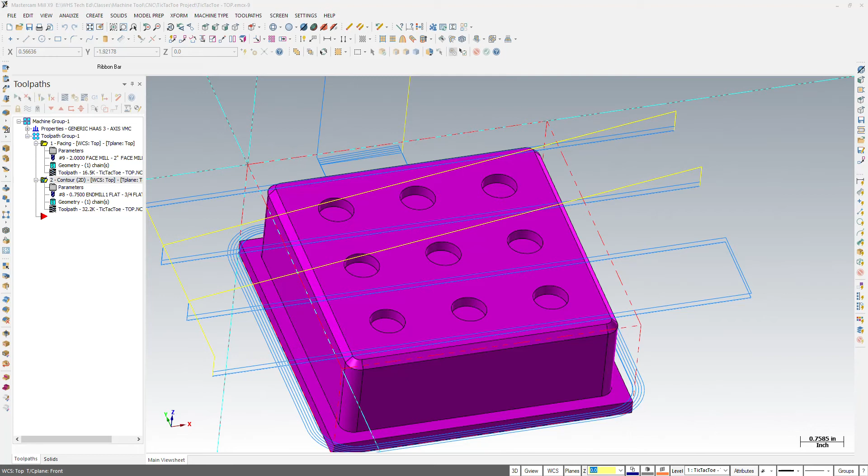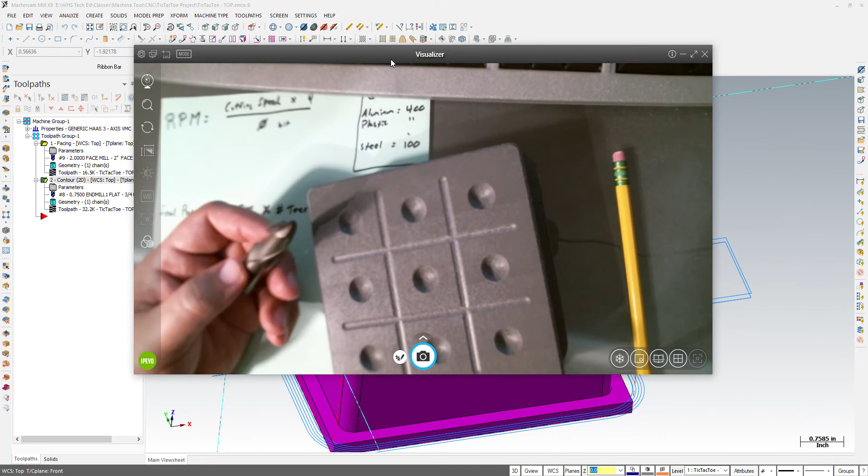Well, our next process on this Mastercam Tic-Tac-Toe project is going to be the dimples on the top. And for those dimples, we're going to be using a 5/8 inch diameter ball end mill, and we're going to be basically just drilling into those holes. So the CAD file does not really match the final product. That's okay, we just need the depth and the location of those circles in order to do a drilling operation

in Mastercam. So we're going to go top view again, toolpath, drill. It asks us what our center points are, so we're going to go ahead and grab each of the center points. You got to be careful that you're not grabbing any other points. We want to get the center point. So right there you'll see as I first hover over that, it gives me the center of it. So if I come over there, the center was highlighted.

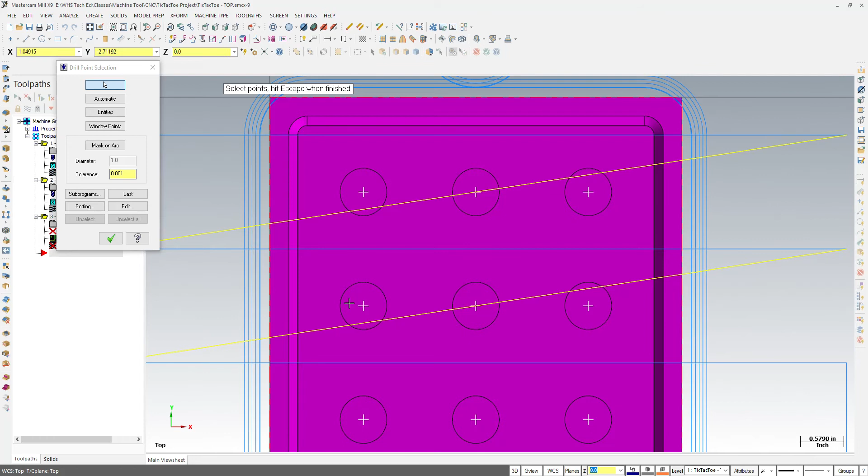So I'm going to come in here, click, and make sure that center is what's highlighted, not an edge or a corner, because sometimes it can grab the wrong point. If I do it right, plus signs are in the middle of each of the circles. And OK. Brings us into our window here.

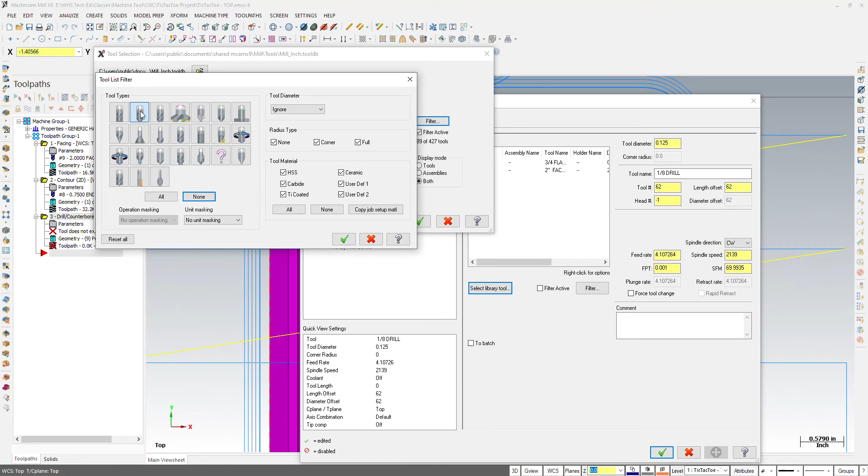So tool, window, we need to go select a library tool, filter, none, and I want a spherical end mill or a ball end mill. And OK. And I'm looking for a 5/8 inch ball end mill. And OK. And I pulled in a 5/8 inch 0.625 ball end mill. This is going to be located in tool slot 5. So change the tool number and the length offset to 5.

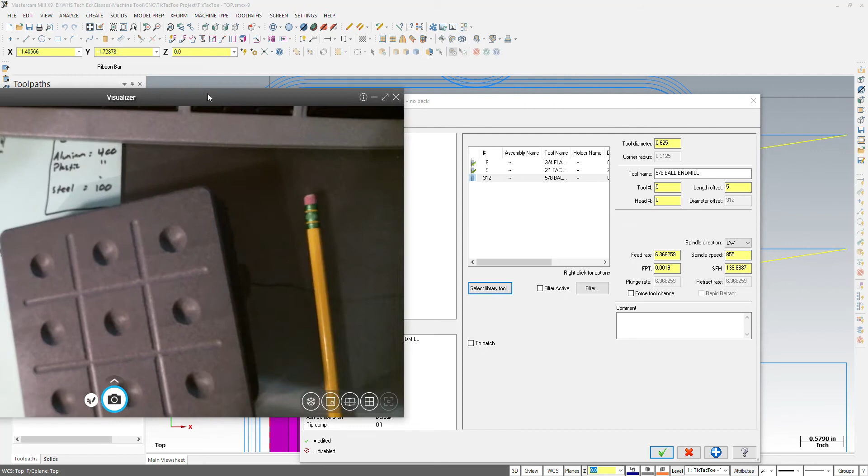Because this is a drilling operation, we don't have a diameter offset because we're just going in the Z direction. So 5 and 5. For spindle speed, going to our formula, 400 times 4 is 1600 divided by 5/8. So 1600 divided by 0.625 is 2500. So for spindle, 2500. This is a high-speed steel bit. This is not a carbide bit, so we're not going to double that number.

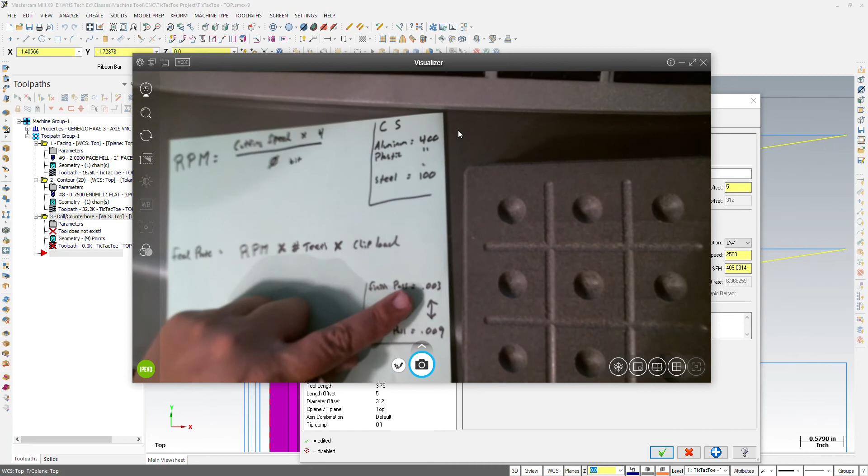For feed rate, it's going to be 2500 times 2. And we're going to go small because anytime I'm drilling, I typically go a little bit slower than normal. So I'm going to go down to the 3 thou chip load for this process on a drilling operation. So 2500 times 2 flutes times 0.003 is going to be a feed rate of 15. Feed rate of 15.

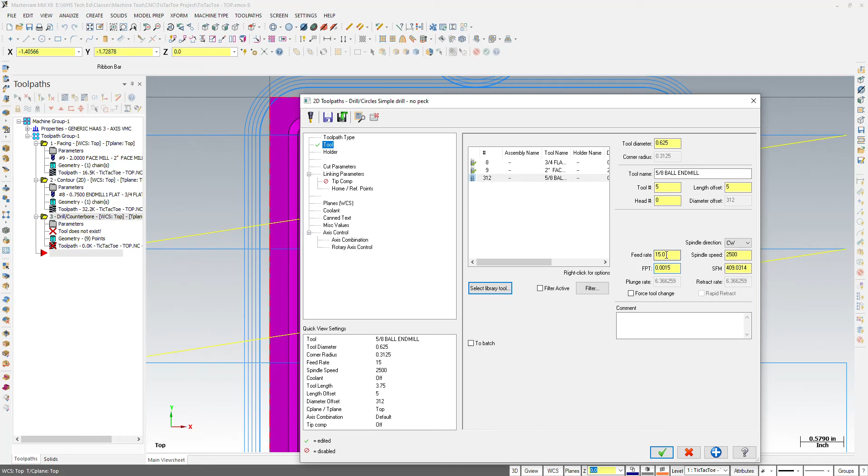Okay, cut parameters. We got all kinds of different drilling options. We have tapping, which would be thread, peck and chip break, boring, all kinds of stuff that we can choose here. We're going to choose peck drill. Peck drill is like a woodpecker.

You know, if a woodpecker is on a tree, its beak comes in and hits the tree, makes a little divot in the wood, the head backs out all the way, goes back in. The same hole, that beak hits the hole again, knocks out a little bit more wood. His head comes all the way back out, goes back in again, and he keeps doing that over and over.

Peck drill is basically that drill bit is going to go in the hole a little bit, come out, go in the hole a little bit more, come all the way out, go in the hole a little bit more, come all the way out. It does that over and over, and that way those chips in the hole get removed out of there. So I like to do peck drill for that purpose. Not that we're going very deep, but it also just gives some relief to what we're doing. Again, maximum depth of cut for us in any time is 0.1, so I like to choose 0.1 for our peck.

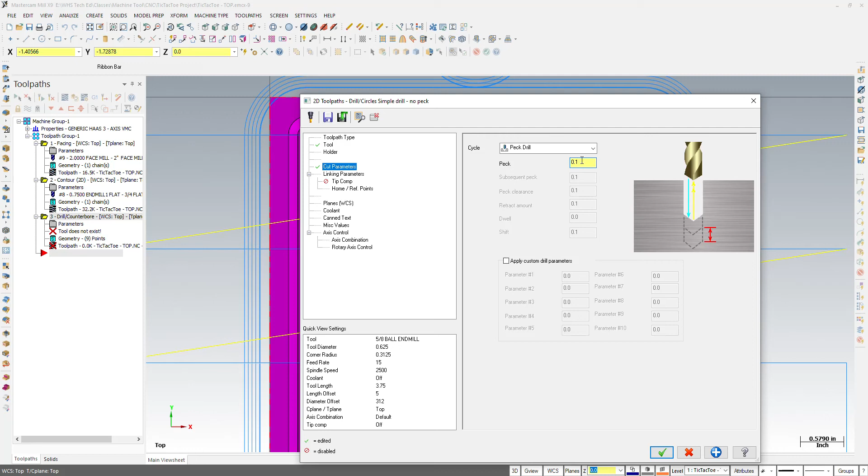All right, linking parameters, absolute, absolute, right down the line as always. How deep are we going to be cutting? Let's turn just a little bit, make sure we grab the bottom of those pockets. So there's the bottom, click, that's a negative 400 thousandths below the original top of stock, which is only 200 thou down below the part.

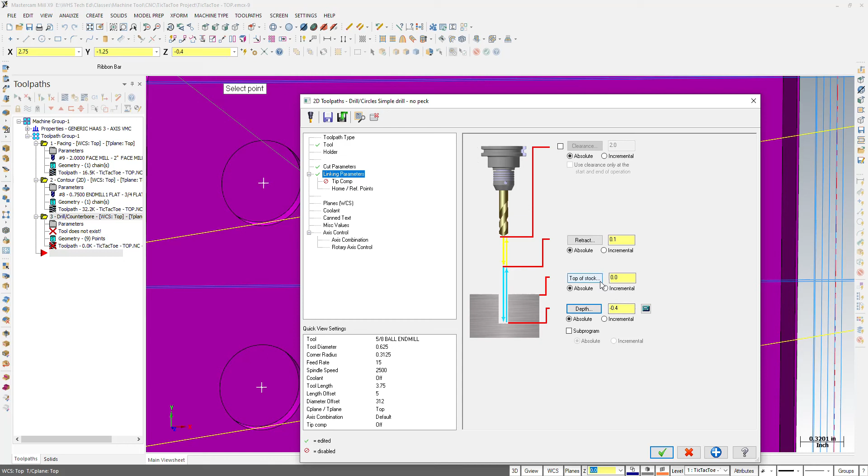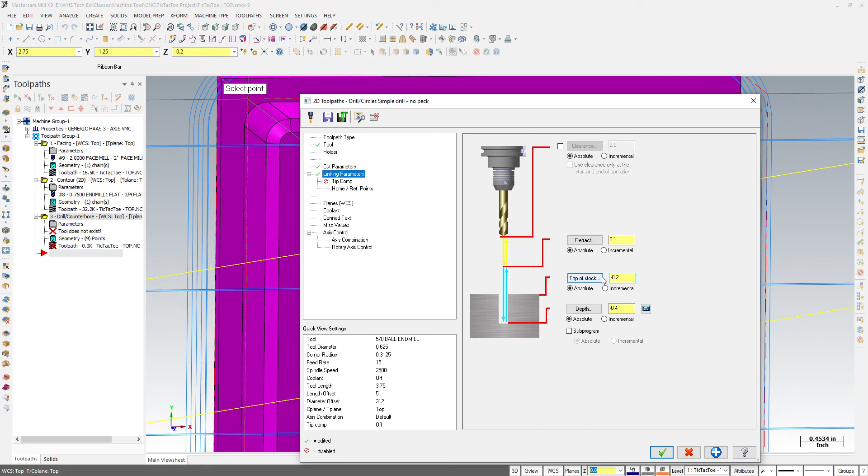So we're going to choose for top of stock here to actually be the top of the part. And the reason for that is because when we peck, if we don't, it's going to peck out in midair. So top of stock is going to be top of the part for this particular operation, which is above our depth. So when it comes in and pecks, it's going to start that above the part. And that should be it for that operation.

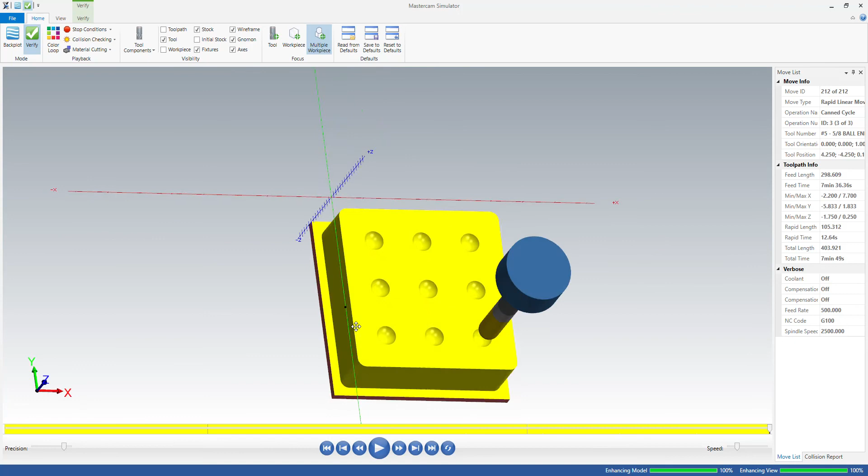So green, green, verify, simulate, and play. And there is our nice setups. So let's go ahead and look at it this way. Front view, Alt S, green, green, back plot. Play, and I'm going to speed it up till I get to those steps.

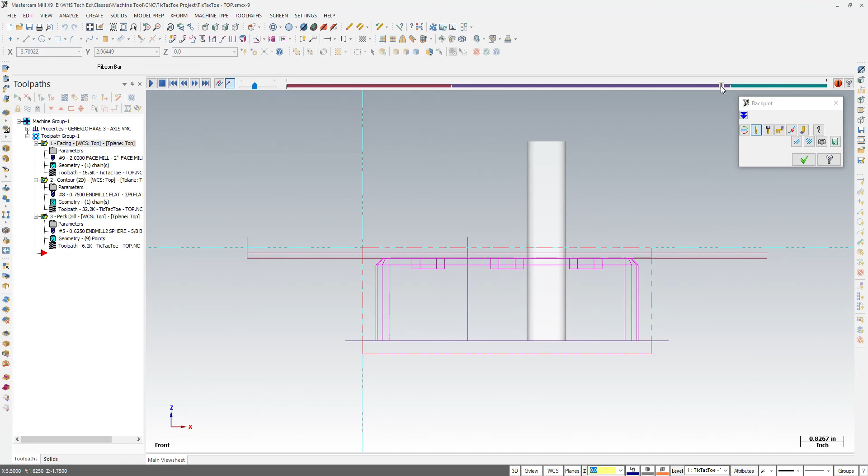I want to back this up over here. Slow it down. Which way is slow? I don't remember. There we go. So there's going into each of those holes. It usually doesn't simulate peck drill in the actual simulation of Mastercam for whatever reason. But there we are. All right, so that was peck drilling.